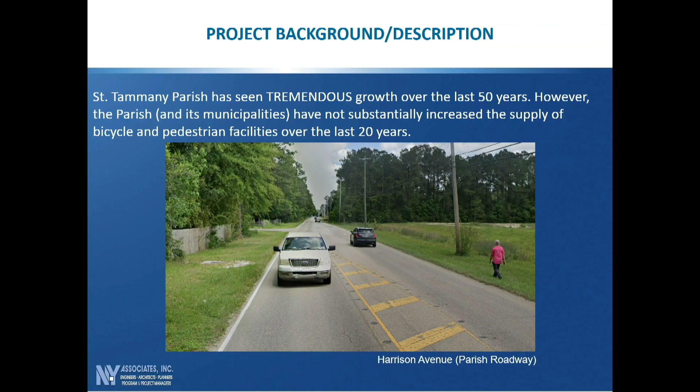There's been a lot of movement to better this situation. The New Directions 2040 plan was adopted just 3 years ago, and it provided different strategies and incentives for bicycle and pedestrian accommodations, and for not just new roadways, but also to retrofit existing but incomplete roadways like the Harrison Avenue we just saw, so that people can walk and bike safely within Tammany Parish.

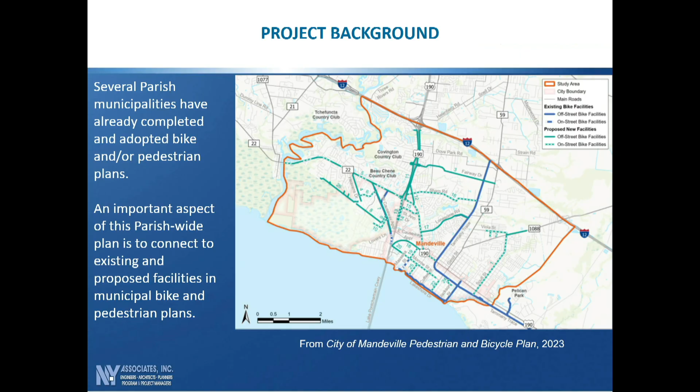There's also been, in the background, a lot of the cities, Mandeville, Covington, etc., that have already completed and adopted their own bike and/or pedestrian plans. This is an example from Mandeville showing some of the routes they looked at. An important aspect of this Parish-wide effort for the unincorporated areas is to connect to the various cities' existing and proposed bicycle facilities, the ones proposed within their plans.

What we are doing under this project, I'll go through this with you very quickly. First off, as I mentioned, the RPC and the Parish, in collaboration with local stakeholders and community input, are completing this bicycle and pedestrian plan to enhance the community's pedestrian and cycling infrastructure. We've been doing workshops, surveys, pop-up events.

We've got a lot of community feedback. We've been doing this over the past year, ensuring that the final recommendations reflect the needs and desires of our residents.

What have we completed to date? Our first efforts: we reviewed existing data and plans, prepared an existing conditions report, and looked at pedestrian and bicycle crash data from the DOTD to find out where the hot spots were we want to specifically identify. We also prepared a base map of all the existing and proposed bicycle and pedestrian facilities in the Parish, from other plans.

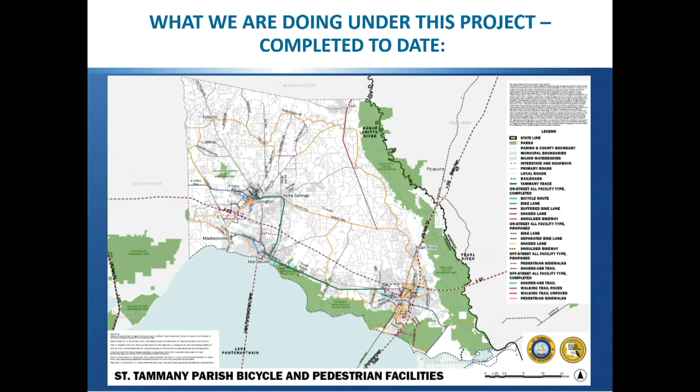That's what this looked like. As you can see, it's not too busy. Most of those lines you see are dashed lines, which represent stuff that's proposed. The solid lines are what's existing. The biggest one you can see, of course, is the Tammany Trace, going from Covington just about to Slidell.

We completed a robust public engagement component, in 2 phases. The first phase was very early this year, January and February. The purpose was to inform citizens about the plan and get their initial input and ideas for where they'd like to see some bicycle and pedestrian improvements.

We did these at places like the Farmers Market in Folsom, the Farmers Market in Abita Springs, and we even took it to the people in Talisheek at the Dollar General, because that was the best place to get people there. We did that twice, in the winter and in the summer. In winter it was freezing cold, and in summer it was hot as heck. But anyway, we got that done.

We also had online engagement. This was very interesting, cutting edge. Amazingly, people have gotten so used to being online that we got most of our replies and input from online services. We had surveys and maps where people could zoom in and say, I want a bike path here, I'd like sidewalks here, we have a lot of trouble crossing the street here. We got a lot of input that way, probably over 300 responses for each phase.

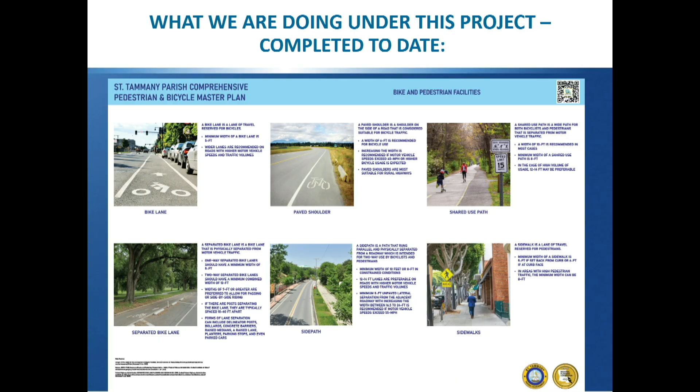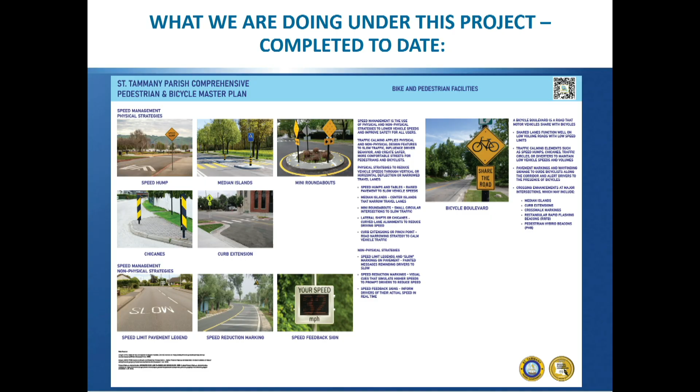One other type we're looking at is bicycle boulevards, up on the upper right. These are basically your low traffic streets where you just put down a symbol on the roadway with the bicycle, and a sign that says share the road, just to let people know bicyclists are out there. There are also different speed management techniques shown on the left here.

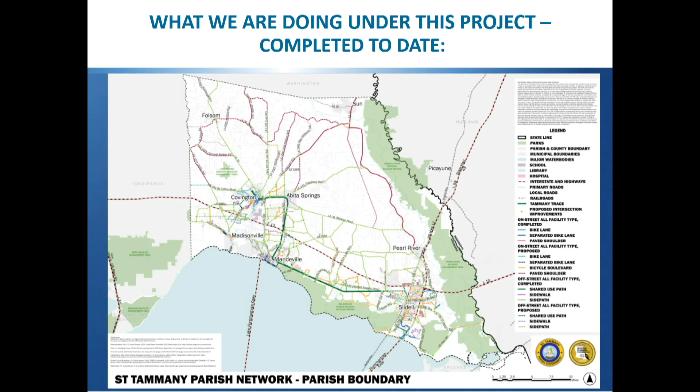This is the overall network map which we came up with. It's a combination of all those different types of facilities — a lot of paved shoulders in the north, the more rural sections, and different side paths, sidewalks, and bicycle boulevards in the south. At this level, it's an overall view you can't see too well, but if you look at the next pages, we're going to focus in.

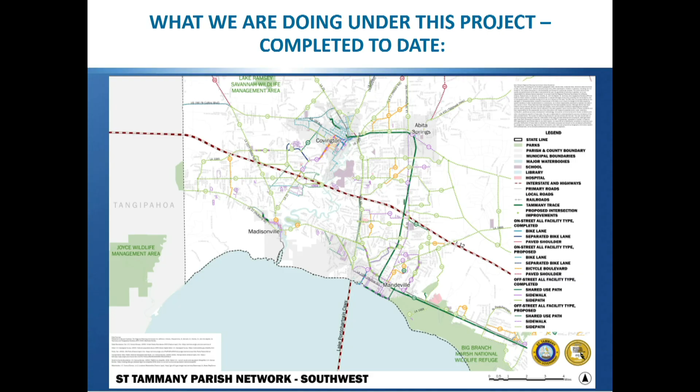Regular green is the Tammany Trace. Blue is bike lanes, and it goes on and on. This is the Mandeville southwest area, and here's the southeast, Slidell, probably the next biggest urbanized area.

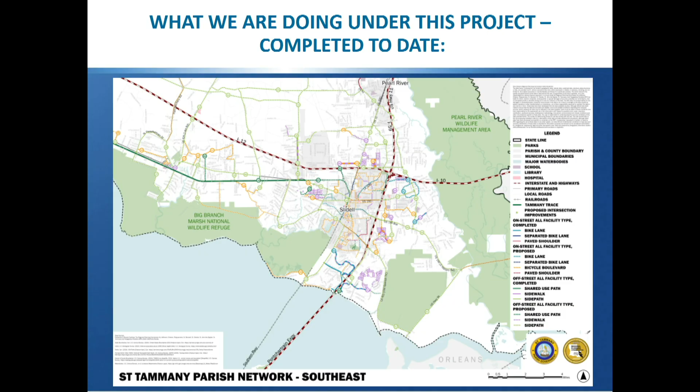You can see how everything on here has a number corresponding to information for each project or improvement. This is a matrix list, and every number corresponds to a definition of the project: what type of project it is, its number on the map, its name, description of what's involved, who's responsible, and which roadway it's on—a DOTD roadway, a parish roadway, or a city roadway.

Estimated cost was done earlier. We've just completed cost estimates for all of them except right-of-way—that's a bit too involved—but we do know which ones will require right-of-way and which don't. If they were in previous plans, we also included the project time frame.

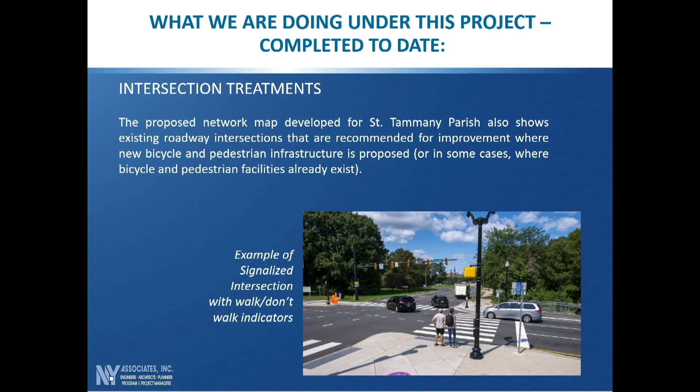In addition to these linear improvements, we identified over 168 locations for intersection treatments. These are not only where new bicycle and pedestrian infrastructure is proposed, but also where some already exist. This one is an example of a signalized intersection already with signals and walk/don't walk indicators—there are actually a few of those already in the parish.

Roundabouts—shown upper left—illustrate how you can get around a roundabout. The right side shows rectangular rapidly flashing beacons, which are pedestrian or bicyclist controlled. You hit them at a crosswalk and it flashes, so you don't just rely on the piano keys across a crosswalk at a corner or other location. You hit this and it lets cars know someone's getting ready to cross.

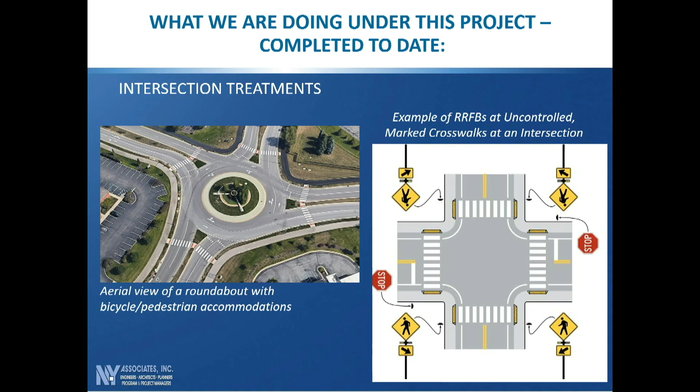Those were the bricks and mortar kind of improvements. We also had several recommended parish-wide policies and programs that are going to be in our plan.

The biggest of these is a complete streets policy. We did a model complete streets policy developed based upon local, state, and national examples. DOTD already has their own, and several parishes have their own. This is going to govern, hopefully, parish transportation projects and private development along roadways targeted for bicycle and pedestrian improvements. The parish is already doing a lot of this with the 1088 bypass—they're including a side path along with that.

Some other recommendations were to maintain the parish's incentive program for sidewalks in new residential subdivisions—we've heard this has been very successful—and to promote pedestrian and bicycle connectivity between adjacent neighborhoods and subdivisions. Not automobile connections, but at least pedestrian and bicycle connections, so maybe kids can get to the next neighborhood without having to go on a busy highway.

We want to maintain existing and future pedestrian and bicycle facilities. Bike paths get cracks in them, potholes, trash on them, just like roadways, so we need to keep them clean and keep up with them. And perhaps establish a pedestrian and bicycle advisory committee.

A couple of programs we looked at: there are several educational programs offered by different organizations, like Bike Easy, Bike Law Louisiana, et cetera. There's also encouragement programs the parish can look at—walking maps, mobile apps showing the best way to walk, Bike to Work Day, Walk and Bike to School Day.

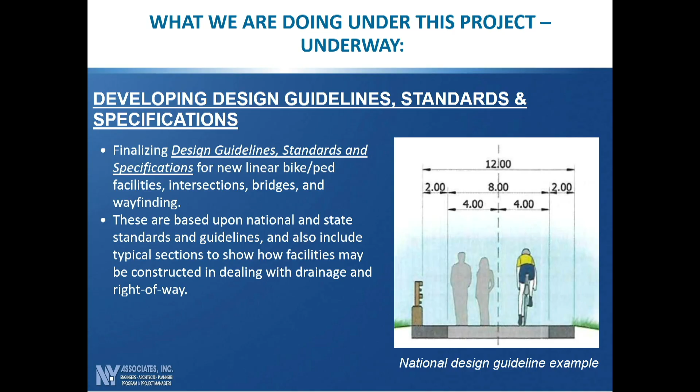We didn't just use a typical cross-section diagram, but we went into different types of facilities, looking at how you would treat drainage, how if you enclose drainage the bike path would be positioned, how you could enclose drainage, and where you might have to shift a ditch. We did all that with our design standards and specifications.

There's an example here of a bigger situation where you would enclose a ditch or swale and put the bike path above it, saving right-of-way and reducing right-of-way cost.

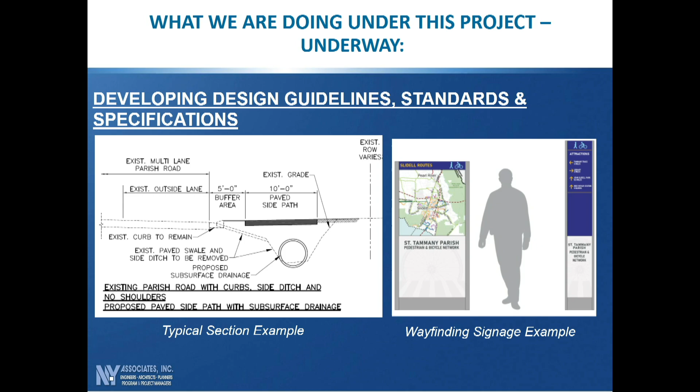We also looked at wayfinding along the way, showing how far you are from different attractions. Here's a map you might use, designed to human scale. You can see the outline of a gentleman silhouette there.

Next we develop a program of projects. We're working on that right now. The cost estimate for all projects and the network plan are basically completed, though they still have to be checked over, along with a prioritized list of short and long-term improvements by location.

We just did our first draft of that. We're going to meet with RPC to review it tomorrow, and eventually it will come to the parish. We'll do detailed project sheets for the first level, the highest priority projects, similar to what was done for the multimodal transportation plan, showing location, information, estimated cost, and so on.

We're also going to write a section on possible funding sources for projects. We won't tell you exactly where to get it, but we'll list different places the parish and RPC can look.

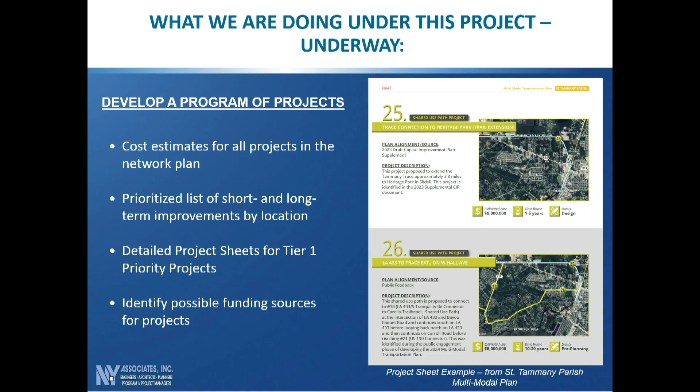The last thing we'll do before this year is over is prepare the master plan document, compiling everything we've done into a draft plan with text, graphics, maps, and cost estimates. We'll work with the parish to present the final document to the Planning Commission for a recommendation, likely by the December meeting.

Again, I mentioned the online outreach. Our project website is right there on the page, and you should have a handout with a direct link to it. The formal public input period has been completed, but we'll still take emails and answer questions as needed.

Anything we've written and completed so far is available online, including maps, matrix lists, and the complete streets policy. You can also email us at the address provided, and we will answer.

That's it. I hope I wasn't too long. Any final comments or questions?

Mr. Richards: Yes, thank you. It's a great presentation. My eyes aren't good enough to read all those little dots and things, so I recommend going online where you can zoom in and see exactly what's going on. I plan on doing that, but this is really exciting. These are amenities that can improve the quality of life of people throughout the parish.